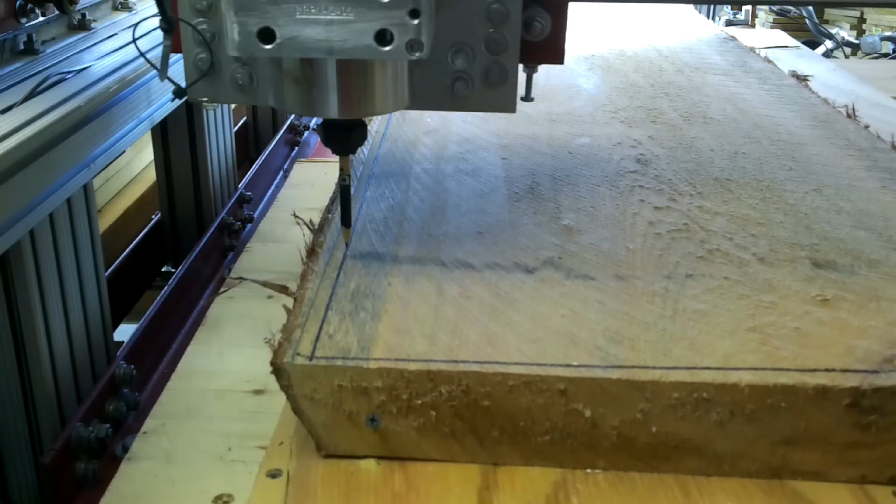Okay, we're all lined up here. You can see where I've drawn that line. And I'm on the line. And we're going to, I'm going to home the device here.

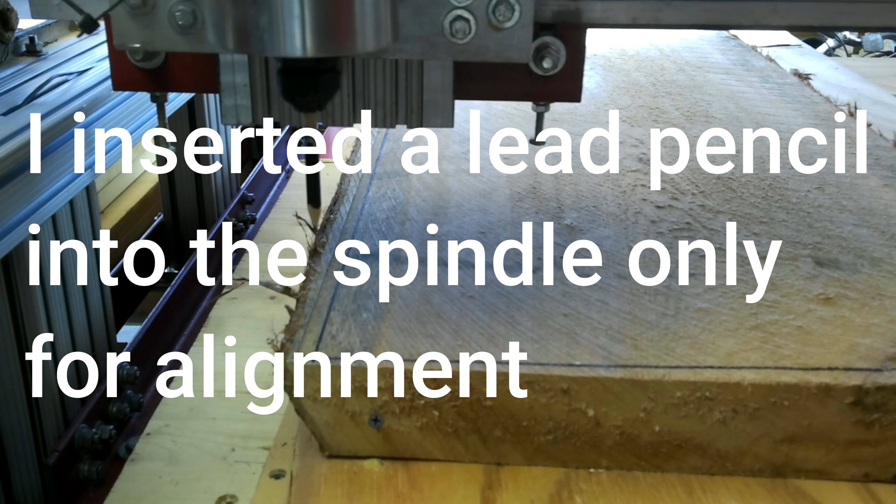Okay, that's our start point. And let me change my mode here. So we just do a step. We don't want to bang into anything.

And now we'll go back to the continuous motion. And we'll go down to our 30-inch mark. Following that line, there's our 30-inch mark right there. That's the end of our first tile.

And I think you can see that good enough. And this is how you want to align your project. And when you align the second tile, the position where it is now is the 30-inch.

That's going to move down to here, down to your start point. Your start point is in that corner for the first one, and when you move it down there, your start point's still going to be here, but it's going to be on the 30-inch mark.

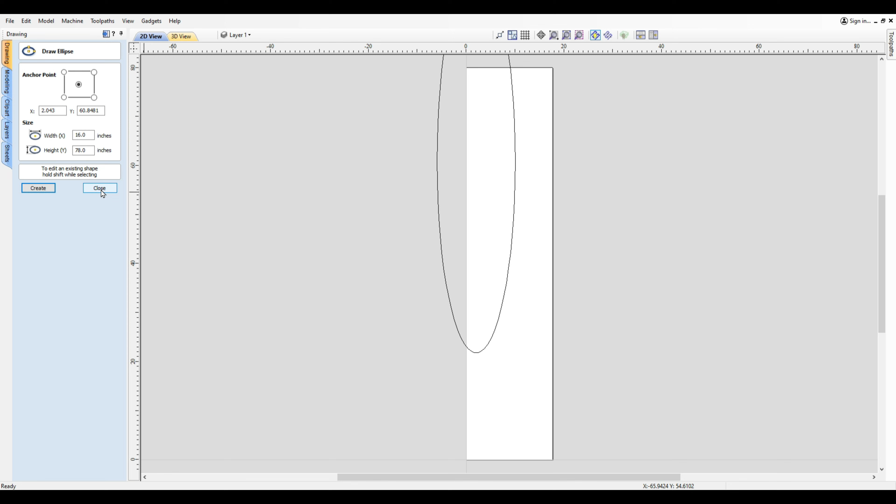The ellipse is going to be 16 inches wide and 78 inches tall, and we'll do a create. We'll close this. We'll select this. We'll go over here to transform objects. We want this for the alignment. We're going to choose this type of alignment here. And it places it into our project, and there we are.

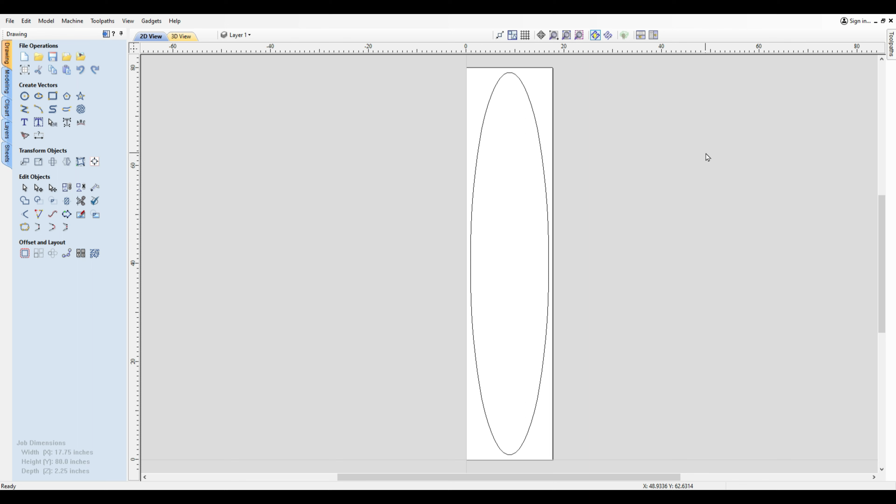Now this is going to be all about tiling, so I'm not going to create the dish, which I've already done. I'll cover that in another video, and I have actually done a previous video, not of this particular scene, but it explains how to make the dish. But I'll do a follow-up with that. I noticed that people are searching for tiling, so I thought I would do a video just on the tiling.

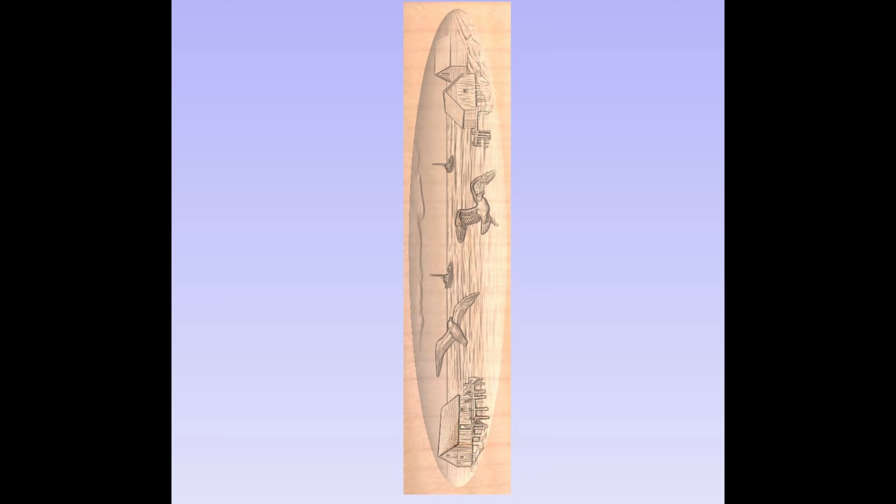So here's my project. This is going to cut a half inch beyond the 26.83 so that they'll match up perfectly. Okay, ours are all the same size, so we're not going to choose machine the smallest first. We are going to update the tiles just in case.

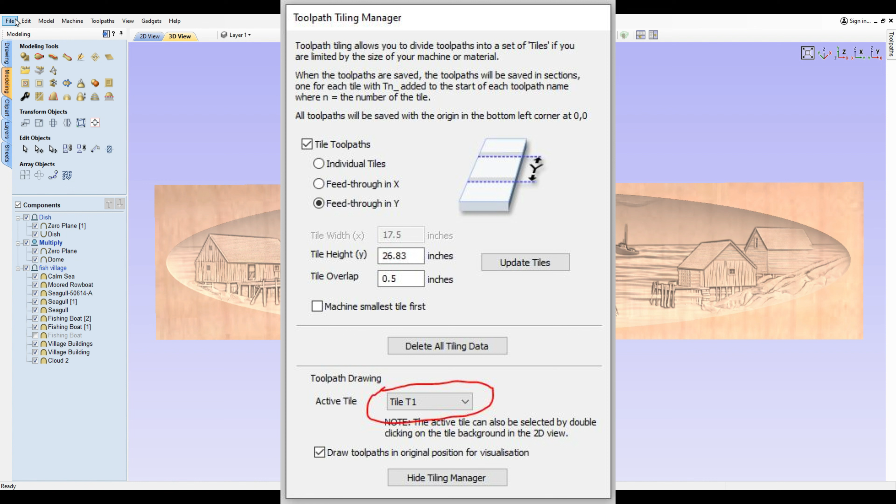Okay, we're going to move this out of the way. See, it's displayed T1, T2, T3, and I'm looking at T1 right now. If I want to change it to 2, we can change it to 2, and there's 2 that shows up in a color, and there's 3, it moves to 3.

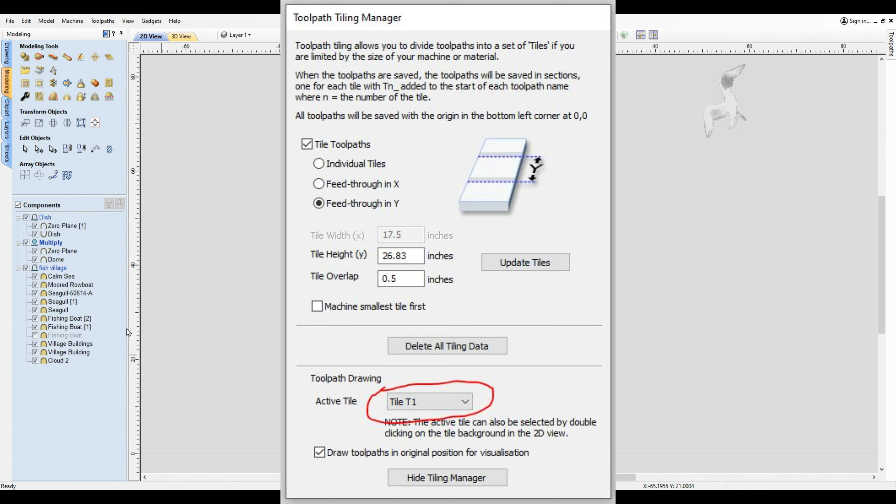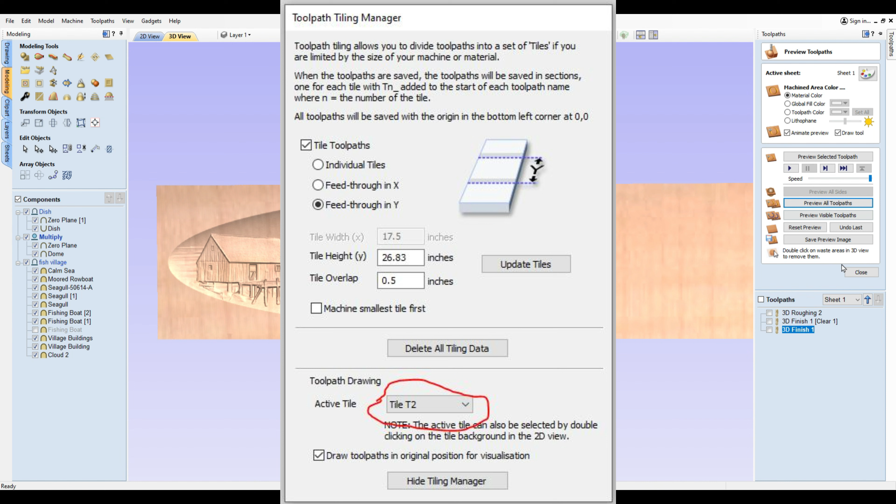Okay, we're going to go back to 1 and draw the toolpath in the original position for visualization. We are there. It's displaying the first T1, the first toolpath. So if we go over here and we change this to 2, and we come back here and we check this, preview all toolpaths. Okay, there's number 2.

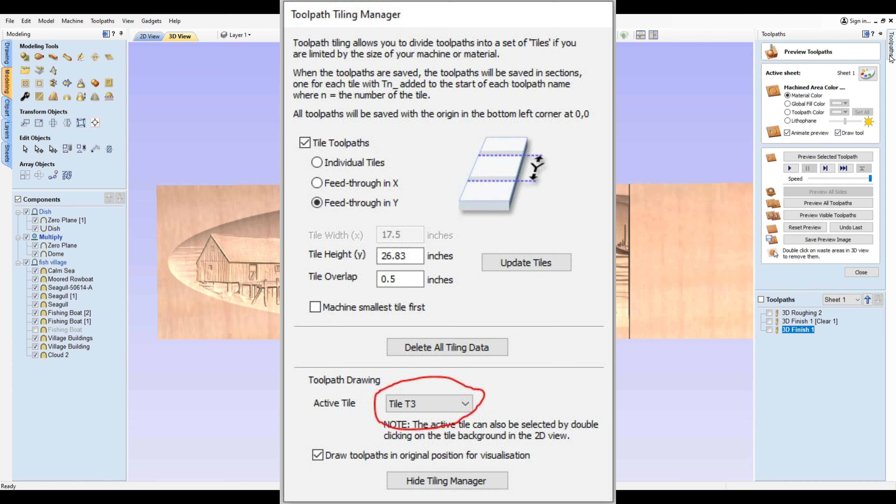Look over here, we'll change this to 3. Come over, click on those, preview all toolpaths. Okay, so that's completed.

Now, when you start this project, of course you have to have this in the vertical position because your machine is only this wide. So this has to go start corner right here. This is where your router bit would be, using a ball nose or whatever. This is where you would start, and this is where it's going to finish, this one right here.

But when you go to T2, this point needs to be down here, so you have to slide this project down to here, because that's your start point again. The whole project needs to come down. This is the end of your machine, it's going to be hanging over. So anticipate that, and I use a sawhorse to keep it from bowing or tipping, because when you get to tile 3, you're going to have quite a bit hanging over.

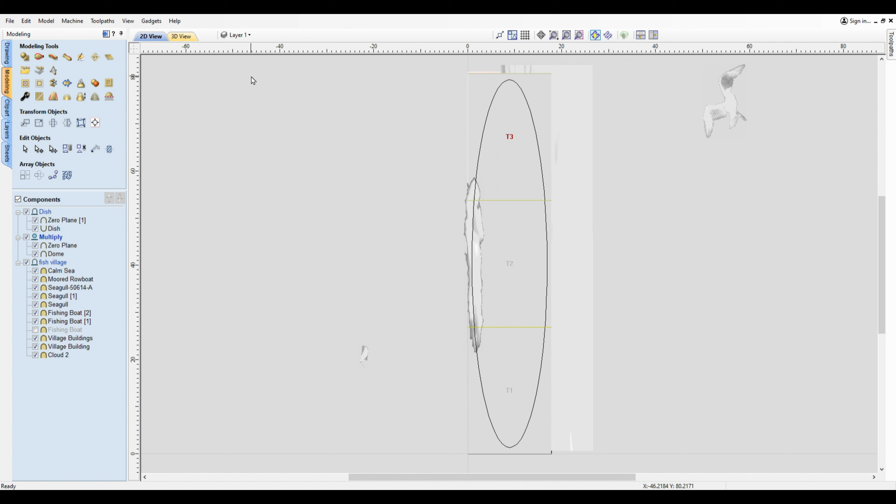And what I'll actually do is I will show you, I'll put a video addition showing you how I set this up on the actual piece of wood, because you need to have a start point for each section, and I'll show you how I do mine.